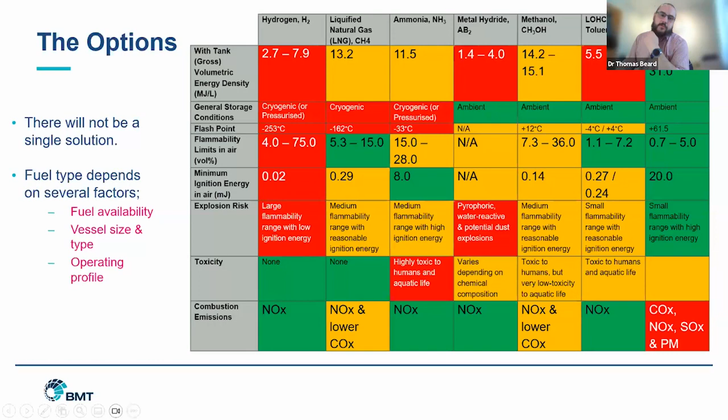I know we've done a lot to get rid of SOx anyway, but the CO2 is still low for anything that's going to be carrying carbon. Other than that, we're just looking at NOx, which we do have to be careful of if we burn it, because it's still a greenhouse gas, or certain variants of greenhouse gases. Others have impacts on health as well.

So jumping into the gas side of things, for hydrogen gas, it's really nice. It's got minimum emissions. It's similar to automotive. Generally stored at high pressure.

One of the worst ones is, as you can see if I just go back one, if we store hydrogen gas down low, if it was to leak, it's lovely, naturally buoyant, and it goes up. But up in a deckhead space on a vessel is where your light fittings generally are. So when they come on, it goes bang.

So we need to account for this when we design things, which I will move on to a little bit later on. We do need infrastructure development still, and I know Professor Chen's going to talk about that later on, so I'm not going to go over that too much.

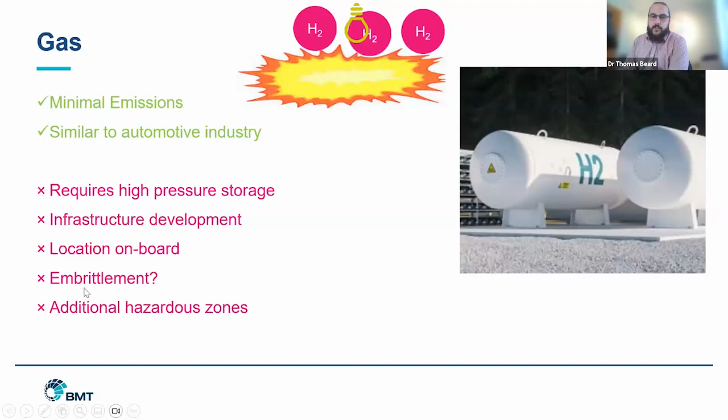There is potential for embrittlement with hydrogen, as always. The location on board, where do you store it? That's a very fun thing that we'll move on to later on as well.

Liquid hydrogen, again, is minimal emissions. Actually, what's nice is that you can store it in a very similar manner to liquid natural gas. The variation is that for liquid hydrogen, we're going down to almost absolute zero at minus 253 degrees centigrade, whereas LNG sits at about minus 162. So there is a massive step change in that, which does have that added problem with the additional energy to get down to that low temperature, which is the cryogenic storage.

And because you're cryogenic, you've got even more possibility of embrittlement because of this aspect. Again, you have potential issues about where you store it. If you think about the Suiso Frontier, which is the current liquid hydrogen carrier that runs between Australia and Japan, they've got above deck storage, and we manage it like that. Again, the infrastructure is an issue, and with all of this, a recurring theme is the additional hazardous zones.

Liquid organic hydrogen carriers can be stored similar to diesel, which is really nice because that means we have minimal changes to storage on board. They are also cyclic in nature.

The way it works is you have your power supply and an LOHC feedstock, which for a simple case is toluene. You hydrogenate your toluene with green or nuclear hydrogen, a renewable source of hydrogen, and then you get your actual LOHC, which if you use toluene tends to be methyl cyclohexane.

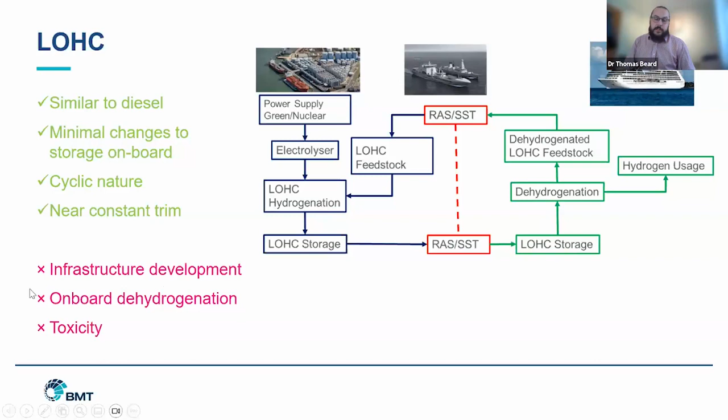And now finally for hydrogen is metal hydride. It's quite a nice one to store on board because you store it in a canister. It's great - you have hydrogen basically around your cylinder.

You absorb the hydrogen by cooling it. When you want the hydrogen off, you add heat and you desorb the hydrogen again, which is really good. There are use cases of metal hydrides already on board vessels - various navies across the world use metal hydrides at times.

What is also good is potentially we can modularize this, so it makes it easier - we don't have to do our absorption on board the vessel. We can take the metal hydride off and have it as a plug and play container system potentially. And because you have to add heat to an extent, unless there's fire, it self-mitigates its release.

But similar to LOHC, you need onboard dehydrogenation - we need to add heat in to get the hydrogen off. Again, depending on how we run metal hydrides, we may need shoreside infrastructure development if we use plug and play. Otherwise, we may have vessels alongside for quite some time whilst we absorb the hydrogen back on.

As I mentioned before about the safety risks, there is a risk because it is generally a powder, of dust explosions if this happens, and the pyrophoric nature.

But one of the biggest problems with metal hydride is the uniformity. There are various metal hydrides we can buy that are almost off the shelf, already developed. There's also significant research going into metal hydrides trying to beef up and get a far greater energy density. The problem is what works in a lab doesn't correlate to full scale - some have worked very well in a laboratory at a university, and when mass produced, it's gone from being a superstar to being absolutely rubbish. So we need to balance that and ensure we know how to build and create the metal hydride such that we can transfer from lab scale up to full capacity.

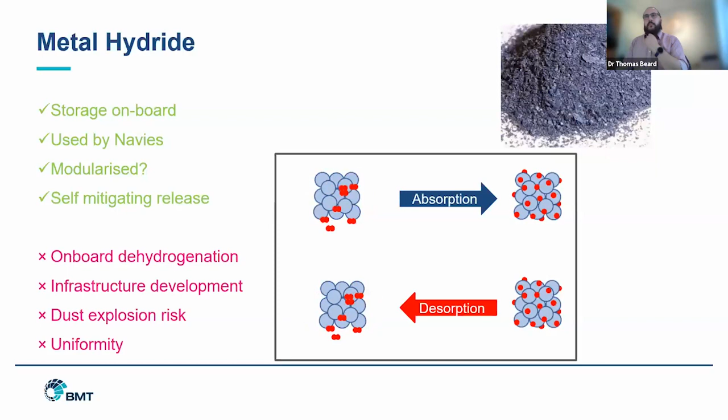Now it's the generic safety. The way it basically happens is we have damage on board our vessel, we would have a loss of containment. Generally you have a release of gas or liquid, or the metal hydrides are slightly different because that will just ignite in air generally.

Then we either have immediate ignition where we get flames and fires, potentially a fireball, especially if it was compressed hydrogen, or if there is delayed ignition, we get a gas cloud or vapor forming, followed by delayed ignition which is a deflagration or potentially an explosion depending on where it's stored.

Or in the case of something like ammonia, you get a toxic cloud form, which again we need to manage. So we need to ensure we're happy with that and how we can mitigate all of these potential risks on the basis that there is a loss of containment.

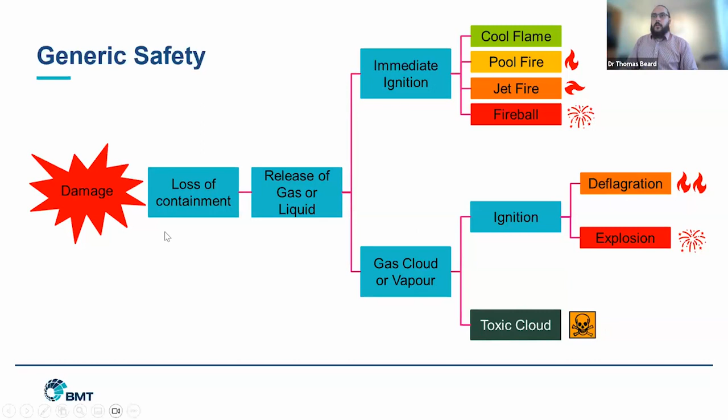I'm going to briefly discuss this. One of the things we see a lot is how we bunker safely. How do you do this? I believe Professor Chen's going to go over some of this later on. My personal view is this is a system about how they recharge hydrogen cars, to a hydrogen dispenser. This is a hydrogen car where it's plugged in. This is for compressed gas, but the way it works is you have a data coupling such that if this breaks, the refueling completely stops. I think that's a really good way of how we could potentially mitigate that.

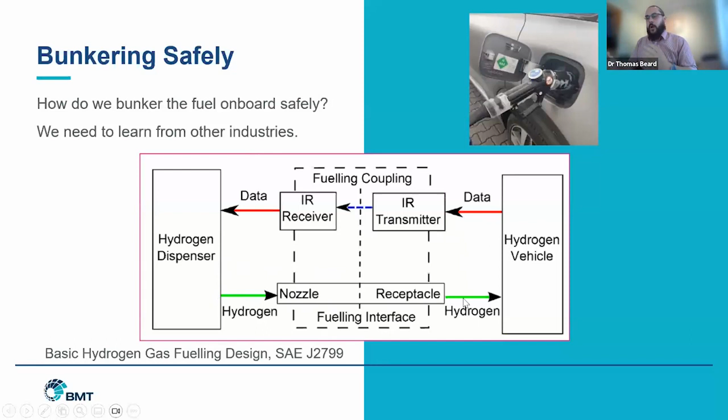Right, some of the requirements of vessels though, so that's all about safety and about some of the fuel. One's fuel availability. In Australia, I know there's a very big push for hydrogen, which is brilliant, and we're going to do that. In other nations, it's not quite the same. The fuel availability is a bigger problem when we look at deep sea shipping. Generally, these require higher energy densities. A lot of people are going towards ammonia or methanol, at least right now, because it's more available. And the issue with that is then we need to have it bunkered at all the ports we go to, which is why there's a very big push at the moment for green corridors.

If we take Singapore, they will have agreed the fuels will be at both ports for the vessels going along that trip. Short sea shipping, we've got the potential to use lower energy densities. That's where hydrogen really can come into its own, and electricity as well. So we could just go straight to batteries. But the other thing we need to factor in is the vessel usage, so cargo carriers versus passenger vessels, which I'll just delve into a little bit now.

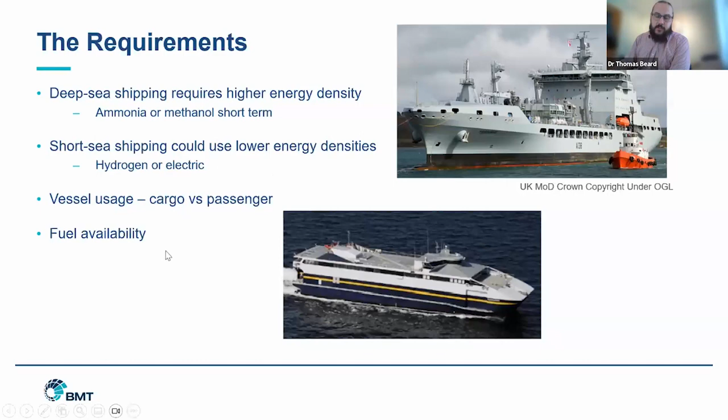Cargo vessels generally have a low population density, and the crew is normally very highly skilled, which allows us to segregate areas. This is a picture of a Tide class tanker for the Royal Fleet Auxiliary, a naval vessel that refuels warships at sea. This is slightly different, but it's a BMT design, which is why I've used this. This one has a crew of about 110. Most carriers like this, generally in a commercial setting, you're talking maybe about 20 people, which is far better. But it can carry over 20,000 cubic meters of liquid. So what that means is that we can segregate, distance, and keep people safe regardless of where the fuel is on board.

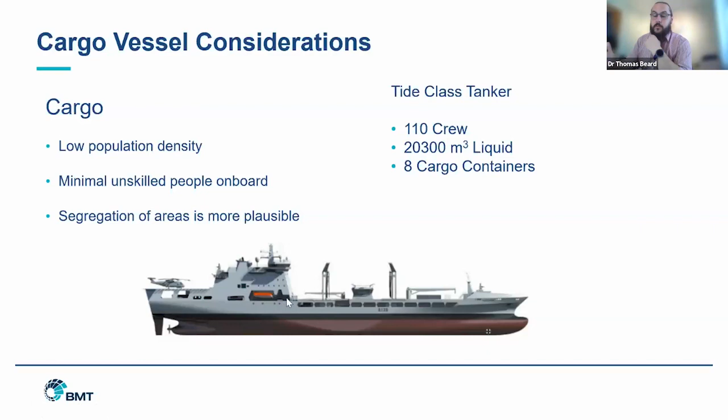The reason I pull this one up is because cargo compared to passenger vessels—this is a Pentland Islands ferry. Ferries are far more difficult. They have high population densities, with lots of unskilled people on board, passengers who don't know what to do in the event of an accident. It also makes it potentially very difficult to segregate areas because you have people all over the vessel. This one carries 430 passengers, with only a crew of 12, and carries 110 vehicles as well. So on something like this, where do you store the hydrogen when you have a vehicle deck full of cars? You have people all over the vessel, so you need to factor that in.

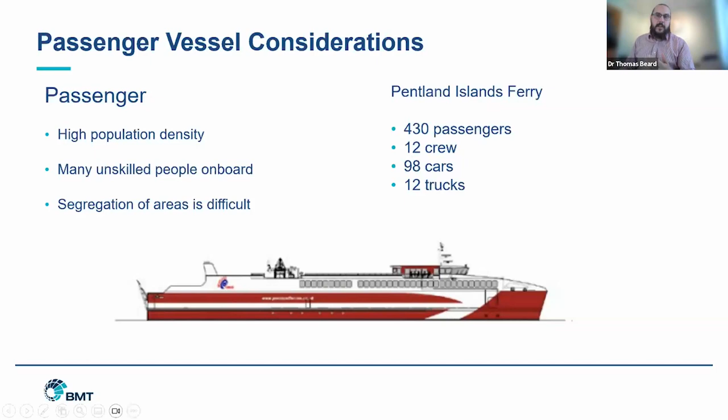From here, I'm going to delve now quickly into design considerations. These are BMT's vessel designs. This is one of our CTVs, crew transfer vessels, workboats. That's a catamaran, and this is one of our super yacht designs.

Basically, it depends where we store it. On the super yacht, we've got storage below deck, which means this is all gas tight. By gas tight, this is where it makes it very difficult for retrofit. Gas tight is very easy for a new build because you can ensure and test it. It's very difficult to ensure that a compartment is gas tight if you are retrofitting, and you've got to do far more work, which can be a problem. You also need airlocks and/or water curtains surrounding anything that carries the fuel. So if I take the GA here of the CTV, if we've got fuel here and the prime mover here, we need to ensure both compartments not only are gas tight, but also the entrance into them has an airlock and potentially a water curtain as well.

And you need alarms so people know if they're entering that area, well, they can't enter the area if there's been a leak. So for instance, if we enter into here from an opening, we need an airlock somewhere here which segregates out. You wouldn't necessarily need an airlock between the two compartments, but you need a route there. On a smaller vessel, it gets quite difficult.

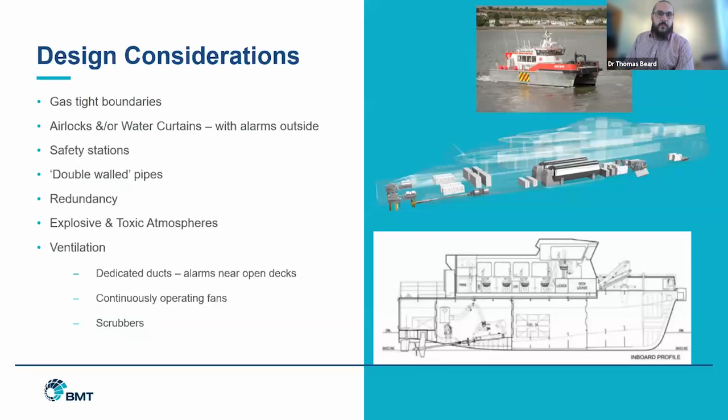So finally, just to move on to some of the environmental considerations. I don't like the term, but hydrogen is an indirect greenhouse gas. Now, what I don't like about this is that when we talk about hydrogen, it's always referred to as its fugitive emissions, which makes it sound bad. When you talk about methane, which is also a greenhouse gas, it's called methane slip. So to me, we as an entity, as a race, and as engineers and scientists, we should use the same terminology.

It's either fugitive emissions for everything, or it's just hydrogen slip. We shouldn't, just because of the way it's being purveyed, call it fugitive, making it sound worse than slip. Slip sounds like an accident - okay, it's a bit of methane slip, ammonia slip, oh well, a little bit of an accident. Fugitive emissions sounds far worse. That's something I personally don't like, and I think we need to move away from. It should all be fugitive, or it should all be slip.

We do have a problem when we burn hydrogen with NOx. We can manage that to an extent, but then you're not getting complete combustion, so we need to manage that - you're not getting that efficiency saving off the engine. If we talk about fuel cells, however, they just produce water, which is ideal. However, we do need to be careful, because we are basically producing pure water. So if we pump that overboard, it's considered a pollutant, because we are changing the local sea state, the salinity, and everything else.

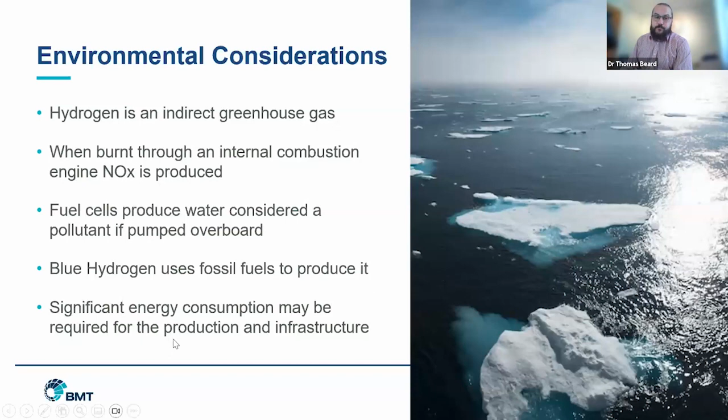So just to conclude, really, each fuel or storage medium has positives and negatives, but we do need hydrogen no matter what. As I've said before, Professor Chen's going to talk about the significant infrastructure required for this. If we move to retrofit on board existing vessels, my personal view is that we should look to external storage - it's far easier to mitigate. And when we go to new build, then we could go below deck. Again, there are different things that we need to account for.

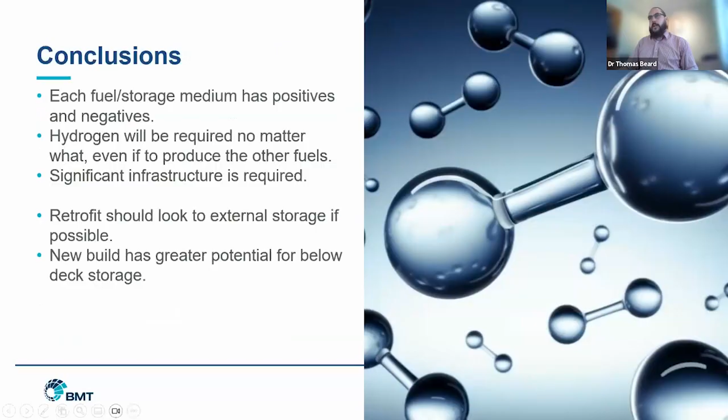Cheers. Thank you very much, Tom, for that comprehensive introduction. I learned a lot listening to you about how to think about some of these challenges, and you've already sparked a lively debate in the Q&A. May I now invite Associate Professor Peggy Chen to take over for our second presentation on ports, opportunities, and challenges in the global hydrogen supply chain.

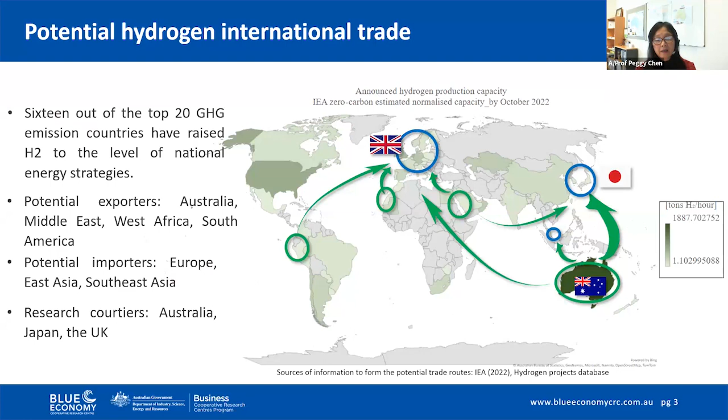So when we read through all the different strategies, we discovered some potential exporters and importers for international hydrogen trade. For example, Australia and the Middle East could be exporters, and in East Asia, like Japan, or Southeast Asia and Europe, could be importers. So this study picks countries and ports from Australia, Japan, and the UK as research subjects, because these three countries are at the front line of hydrogen industry development.

So if you look at all these different elements of the supply chain, the challenges actually occur along the chain.

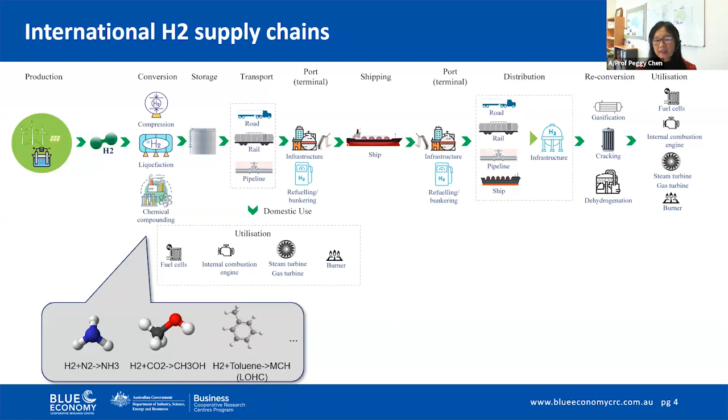And that's why we try to investigate all the challenges and opportunities for ports and find out some solutions. So the research framework for this project actually uses literature review and interview surveys. And from the literature review, we already published a paper in the International Journal of Hydrogen Energy this year.

So we reviewed the port readiness to facilitate international hydrogen trade. Following the review, we did 27 interviews with industry professionals - 13 in Australia, 9 in Japan, and 5 in the UK, including ports, producers, exporters, importers, shipping companies, and governments. After that, we identified a lot of issues. Then we moved to the survey, covering ports, exporters, and importers, because they export, import, produce, and operate ports - they may understand the readiness of all the infrastructure required, and also some of the issues there.

So that's the research framework. Following that, I'm trying to bring my 90-page report into maybe 15 slides to share some findings with you.

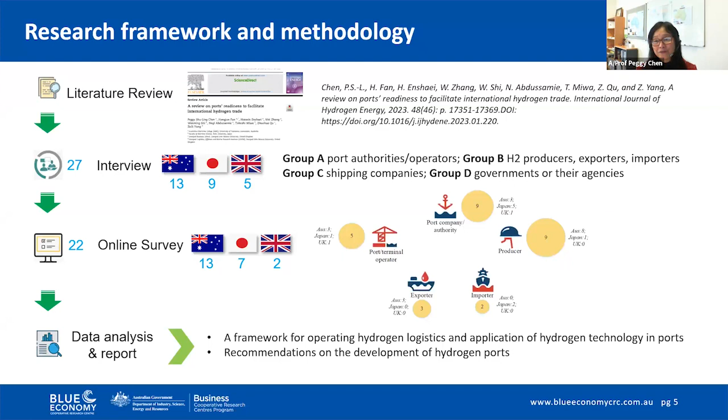Okay, so I will talk about some brief findings from this. The first one is opportunities for ports. There are a lot of challenges, but we can say there are very, very good opportunities for ports involved in the hydrogen supply chain.

For Australia, many participants mentioned it becoming a major exporter of renewable fuels. In the meantime, like Thomas mentioned, we need a lot of energy to produce hydrogen and derivatives, so we also need to import a lot of renewable energy infrastructure equipment or elements. Port decarbonization also becomes a quite good opportunity as well.

In Japan, because they are an importing country, the opportunity is also to enhance their port function in handling hydrogen and increase the volume. But they also want to become carbon neutral ports, very clearly, and they want to decarbonize the heavy industry near the ports.

For the UK, it's a little bit interesting because they consider future energy demand for ports. So they're involved in this area trying to increase the port's resilience to future energy. They also try to provide a greater mix of energy for port customers or for ports themselves. So these are all the opportunities for ports.

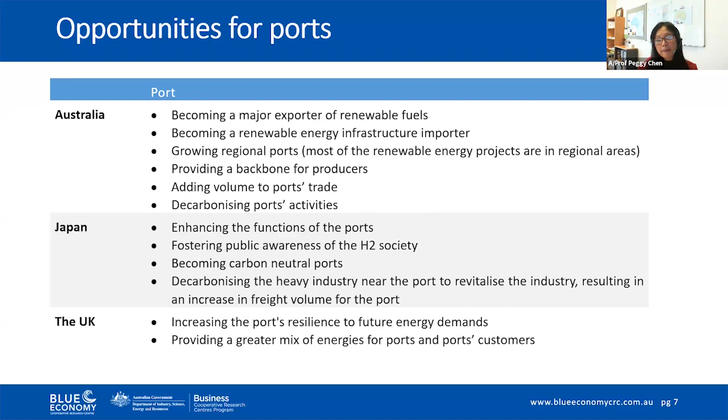Tasmania is also very complex because we have multiple hydrogen derivatives here - methanol, where probably the first project is already confirmed to go ahead, and then ammonia. That could be used for export, but now there's more talk about domestic use as well.

In Japan, you will see in the Kansai area they look at liquefied hydrogen, because they have a pilot project with Australia in Victoria - that's why their focus is liquefied hydrogen. They mainly import it for power generation, for firing power plants, and they import from different sources. They already have quite a few pilot projects.

For the UK, it's mainly from Scotland, and they want to utilize their offshore wind to produce hydrogen, and export it to Europe, the EU mainland, focusing also on ammonia and methanol. I think the UK now has more projects ongoing.

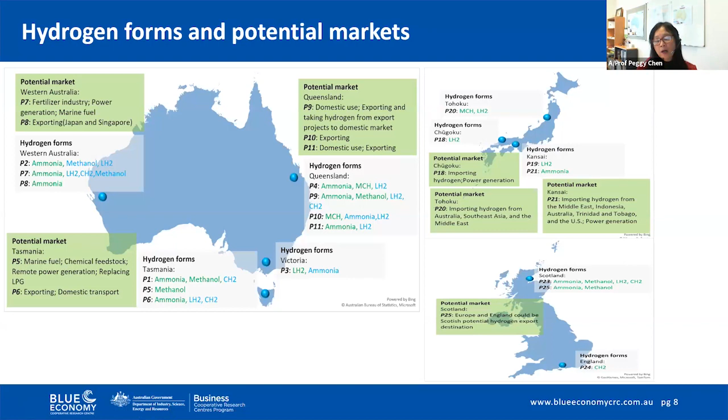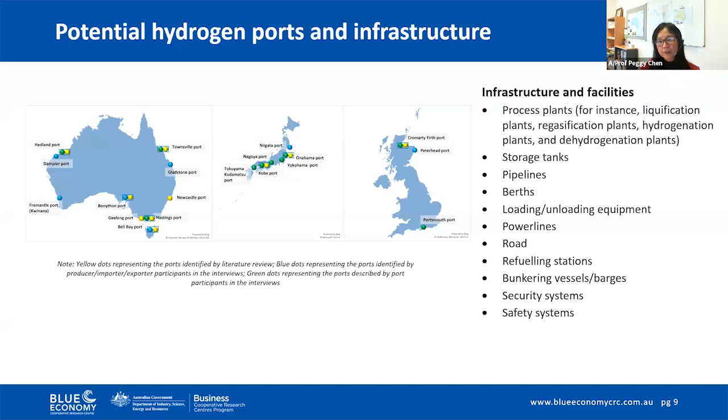In the survey, we asked participants to rate readiness for this infrastructure. I want to mention Tom's point about the risk on board when using a different fuel. For hydrogen, it's actually a new commodity for ports, and it's essential to establish a new risk management system from scratch. But for ammonia or methanol, the industry already operates with these, and even ports already operate with them, so some participants don't really think the associated risk is a really big problem.

But the issue is that before, ammonia and methanol were used for the fertilizer industry or as a chemical feedstock.

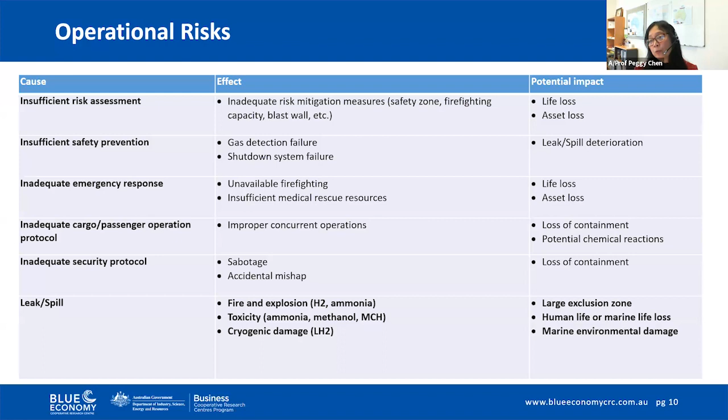For training and education, it's interesting because there are some available training programs in the market in the three countries, but the programs mainly focus on basic knowledge, not much real world operation training. So the interviewees also suggested ports to have safety, health, materials, equipment, cargo operation, or cause and effect of incidents, emergency response training and education programs.

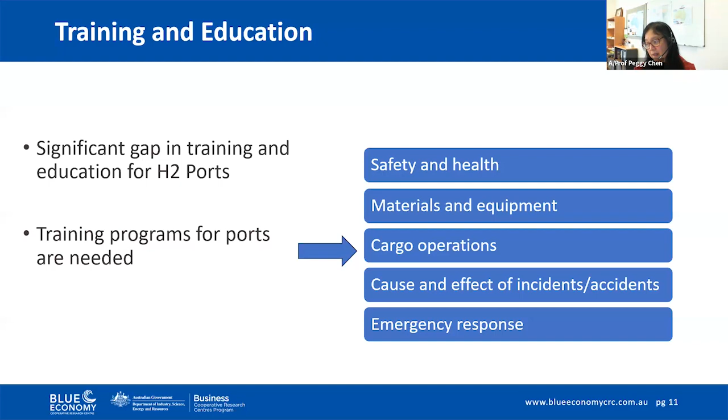That's really required. Talking about standards is also interesting because we all know standards are very important for managing hydrogen. For ammonia and methanol, actually there are standards for safety and environmental aspects. But even for hydrogen, international standards also exist, such as ISO or IEC standards. However, those standards are actually used just for industrial use, not for hydrogen or its derivatives as an energy source.

And that's why there's a significant gap in standards and codes for ports. So to ensure the efficient handling of H2, standardization is necessary, such as for port storage, pipeline, import, transportation, loading and unloading processes. Some participants also suggested certification standards for the cleanness of hydrogen and derivatives are also very important.

We also asked the participants about their view on whether national or international standards are required for ports. The majority said international standards are preferred. It could be because ports, like shipping, are an international industry, and they argue the same cargo moving from the exporting to the importing port should apply the same standards. So that's related to our standards.

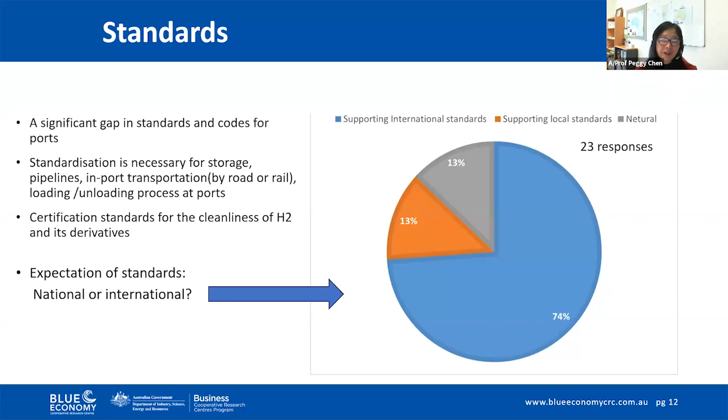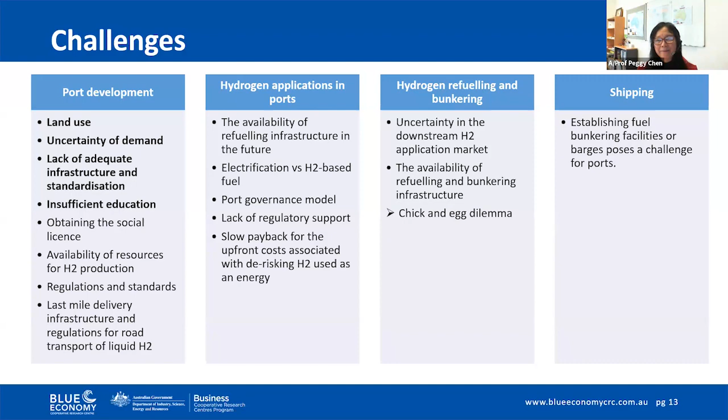So the final bit for the interview findings is government support. It's interesting to see that among these three countries, Japan has received very good support from government, like a national carbon neutral port initiative, with a subsidy of 50% of the cost of extending the quay for hydrogen importation. The UK also has some, mainly for the ports. Australia, yes, we have, but it's mainly from hydrogen project money. The participants really suggested a lot, especially for financial support, and I think carbon tax and direct finance support were mostly mentioned.

From the regulation and policy side, they really suggested setting port emission targets, which would encourage ports to use hydrogen or derivatives for decarbonization. So this is for the government support.

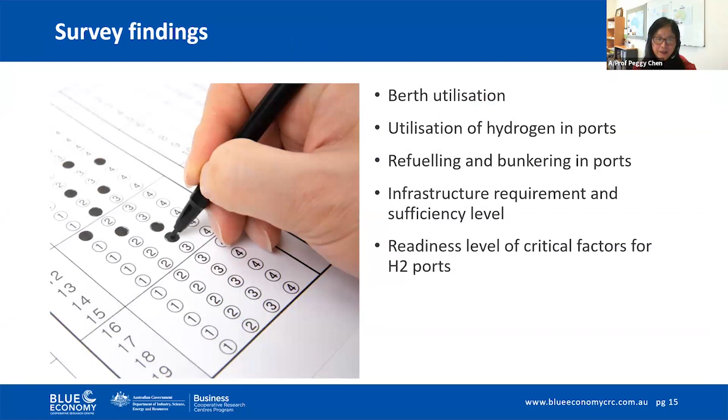Mindful of time, I'll jump into the survey findings, and there's more interesting information you may want to know. So the first survey finding is about berth utilization.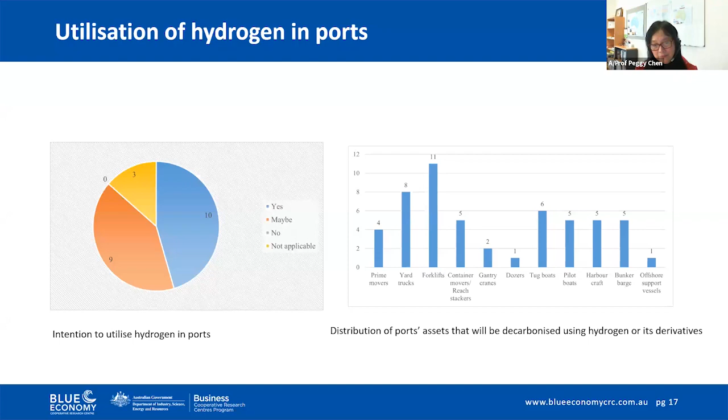The assets they want to decarbonize using hydrogen or its derivatives include forklifts, yard trucks, and tugboats. I think tugboats using hydrogen to decarbonize could be a really good choice.

For bunkering and refueling, 13 respondents said yes, they intend to provide refueling and bunkering service at ports, and 6 said maybe. For fuel type, the first preference is ammonia, then methanol, and liquefied hydrogen is next. I think that's probably because the downstream technology hasn't really matured for vessels to use liquefied hydrogen.

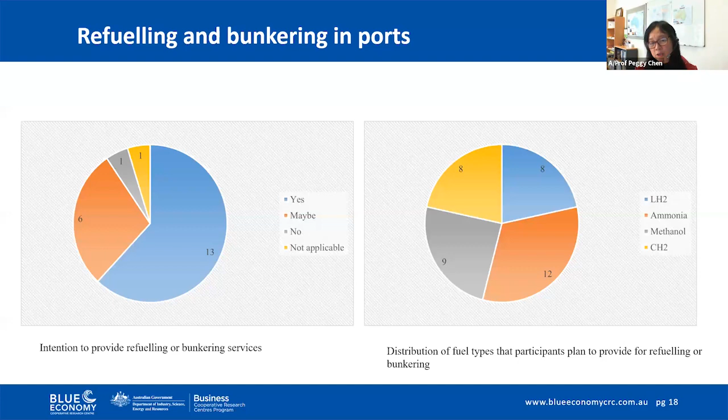But like Thomas said, maybe short sea shipping could use hydrogen, and that may also create port willingness to do bunkering for those small vessels.

For infrastructure requirements, remember we identified those from the interviews, and in the survey we asked them to confirm what the infrastructure requirements are for their ports. Of course different ports manage different types of hydrogen, so hydrogen forms may count differently, mostly in terms of the importance of each infrastructure.

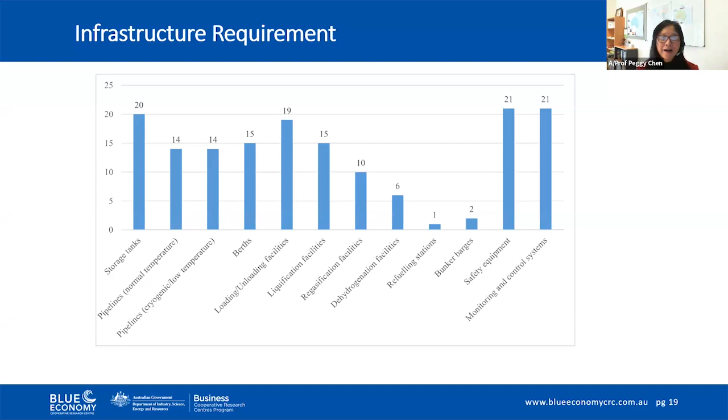Having said that, we asked them to rate the sufficiency level of that infrastructure, and you'll see three tables here. A rating of 5 is acceptable, but the majority of port infrastructure and facilities are below 5 across the 3 countries. You may notice UK only had 2 responses from 2 ports, which is unfortunate. But if you look at Australia and Japan, it seems just under the acceptable level, except berths in Japan and the UK. So overall, port infrastructure and facilities mostly fall below the acceptance range.

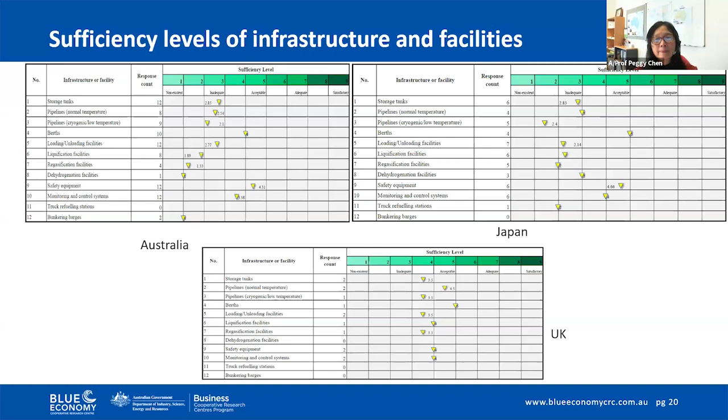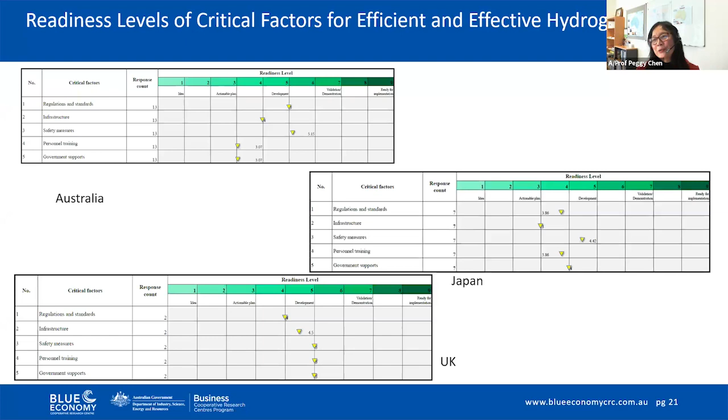We also identified 5 critical factors from the interviews: regulation and standards, infrastructure, safety measures, personnel training, and government support. We asked participants to rate the readiness level of these critical factors for operating hydrogen imports, and the result is similar. I think it's all below 5, probably except Australia's safety measure, which is about 5. This means readiness for these critical factors in all 3 countries is still in the development stage—still a way to go for all three countries.

Based on the findings from the interviews and survey, we developed a framework for operating hydrogen ports. If you look at this diagram, there are 3 main components in this framework. The first is key elements for hydrogen logistics imports, focused mainly on exporting and importing ports on the left and right-hand sides. On the export side, the initial task for ports is to transition themselves to import the necessary infrastructure or elements for producing hydrogen and its derivatives.

That's why new berths may be required, such as for offshore wind farms, solar, etc. Or we may even need to import electrolyzers if we don't produce them nationally or domestically, so more berths are needed to accommodate that.

From the production side, if production happens near or in the port, then conversion into ammonia, methanol, or compressed hydrogen requires conversion facilities, and storage tanks are key to the port. It also has to be, for example, pressurized, and low temperature pipelines are essential for hydrogen and derivative transportation as well.

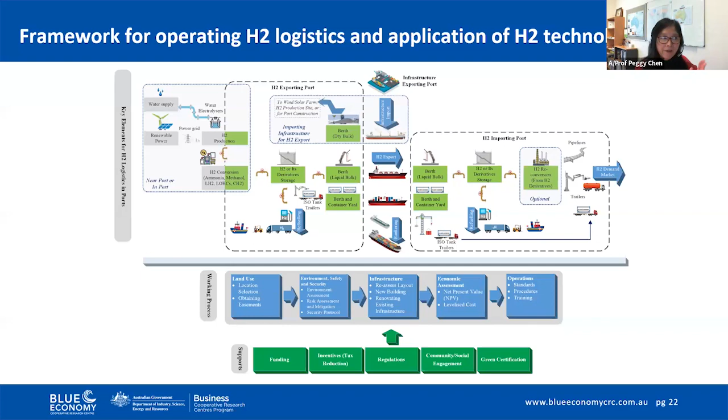The report will be released maybe by the end of the year, it's already finished. So if you're interested, you could request a copy to read the information. That's all from me. Thank you very much.

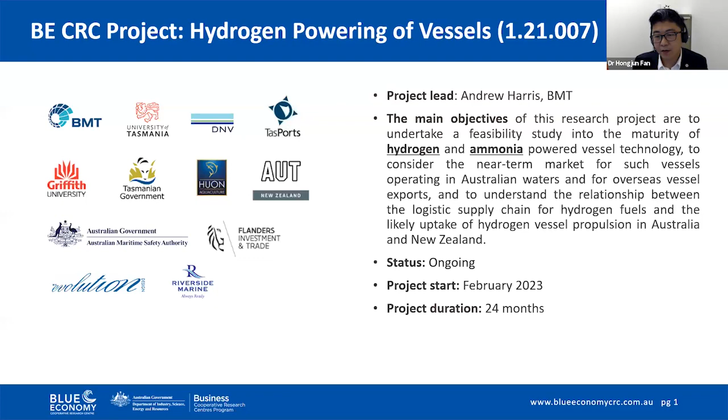The project started in February of this year, and it's a 2-year project. Today I'll share some findings over the past 6 months. I'm going to talk through 4 parts. First, we'll look at the carbon reduction target for Australian vessels and the possible solutions to reach the target. Second, we'll discuss the role hydrogen can play in decarbonizing Australian vessels. Third, I'll introduce a case study we're still working on, looking at the differences between diesel systems and hydrogen systems. Finally, we'll summarize the presentation and outline our next phase of work.

So let's look at the first part. Under the Australian flag, there are 2 types of vessels: international navigation merchant vessels and domestic vessels. International vessels must follow the IMO's decarbonization trajectory. In July of this year, the IMO set a new target for international shipping to reach zero emissions by 2050, or around 2050, depending on different countries' situations.

As for domestic vessels, they must align with Australia's decarbonisation target. The Australian government has set a target to reach net zero by 2050, and for the transport sector it has the potential to reach zero before 2050. So whether international or domestic vessels, 2050 is the deadline.

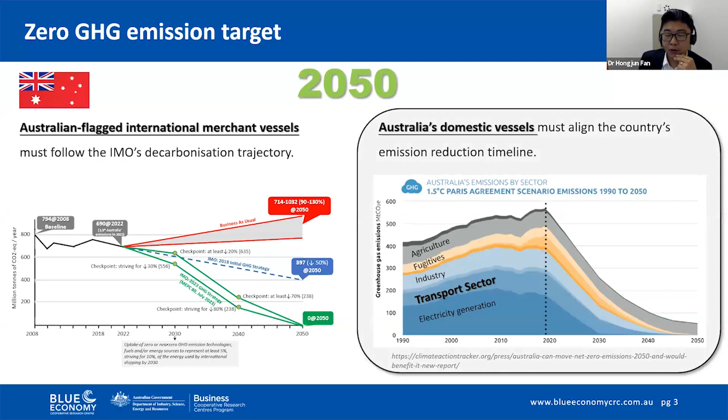Let's look at this. Australia's total emissions in the 2020-21 fiscal year were 465 million tons CO2 equivalent. Of them, the transport sector accounted for 20%, which was 90 million tons. Domestic vessels emitted 2 million tons.

It's only 0.42%, not a lot, but we must take the responsibility. Going from 2 million tons to zero within 27 years from now on is the challenge we are facing. This 2 million tons is our enemy to fight against, so we should have good weapons. The clock is ticking, but the question is where to start.

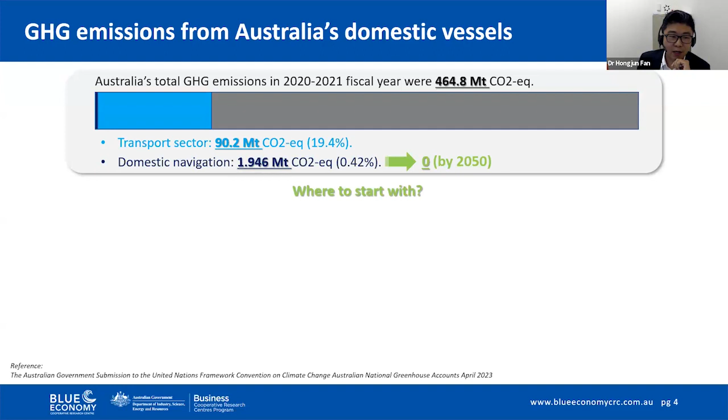Unlike the international shipping fleet, small-sized vessels less than 50 meters long dominate the Australian domestic vessel fleet. According to AMSA, as of July this year, there are 8,700 small vessels operating in Australian waters with valid certificates.

If we zoom in on this number, we can see that 3,600 vessels are over 20 years old. This means these vessels will be replaced with newly built vessels within the next 10 years. So we have the opportunity to put thousands of zero-emission vessels in Australian waters within the next 10 years. But the question here is, how do we do that?

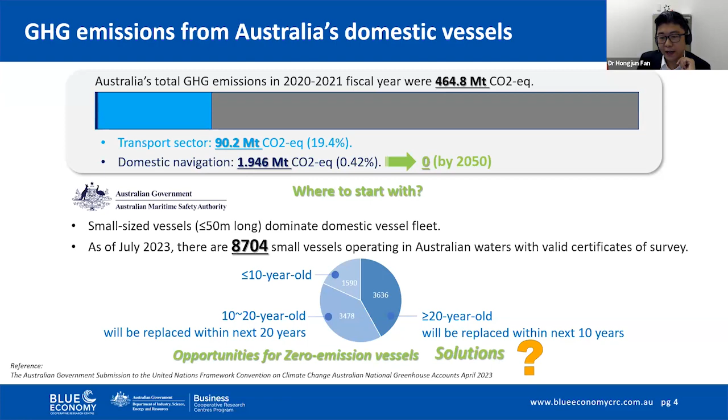This is the family tree of decarbonization solutions for shipping. We are talking about zero emissions, so we have biofuels and green electricity. In the electricity pathway, we can use batteries and e-fuels. E-fuels include hydrogen, e-ammonia, e-methanol, and e-LNG.

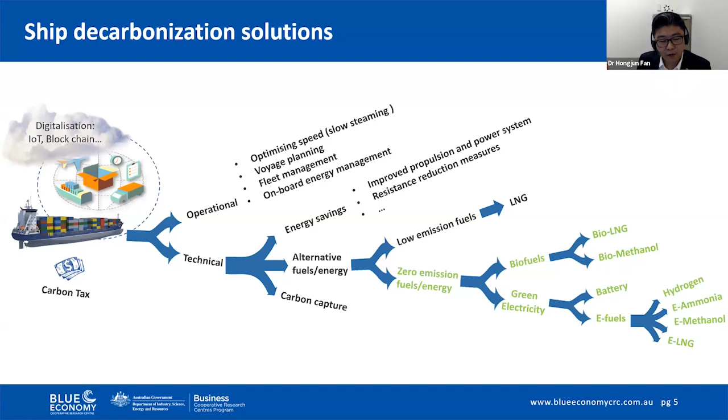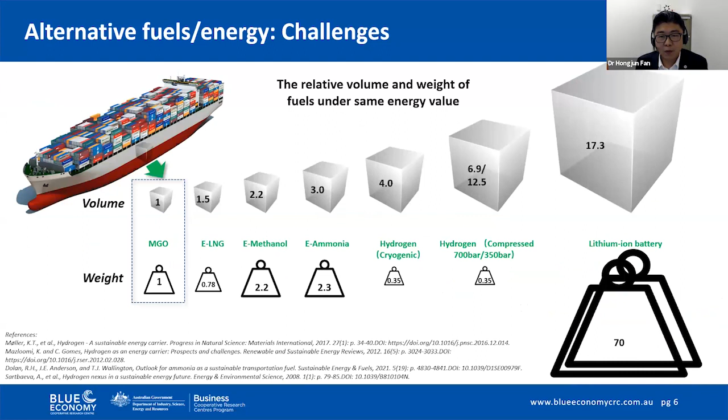So what's the impact of using these fuels for a vessel? Let's look at this. If we use fuel oil, we consider the volume and weight of the fuel to be 1 unit. Let's compare different fuels based on the same energy value. I think Thomas explained this very clearly. Apparently, e-fuels are better than batteries.

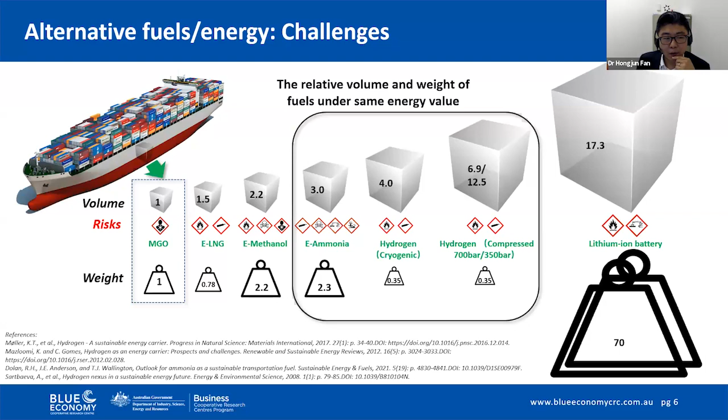When it comes to risks, we are facing new de-risking challenges, of course. In this project, we are exploring the feasibility of using hydrogen and e-ammonia, but this doesn't mean we are against the other options. As a first step, we focus on hydrogen. So how can hydrogen decarbonize Australian domestic vessels? Let's look at the second part.

Hydrogen is a direct energy carrier of renewable electricity, and the well-to-wake emissions of using hydrogen could be reduced to near zero. No air pollutants, no toxicity, and hydrogen storage and PEM fuel cell technologies are mature. However, some challenges must be overcome, as Thomas mentioned: high pressure and cryogenic storage, fire and explosion risks, lack of regulations, unavailable bunkering infrastructure, and the green hydrogen supply chain has yet to be built, as Professor Peggy Chen mentioned in her presentation.

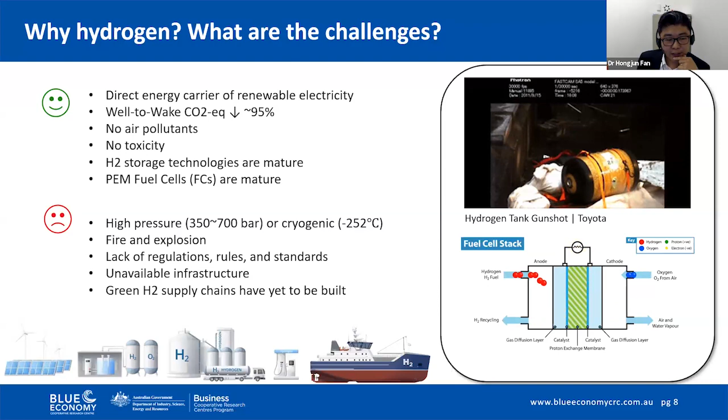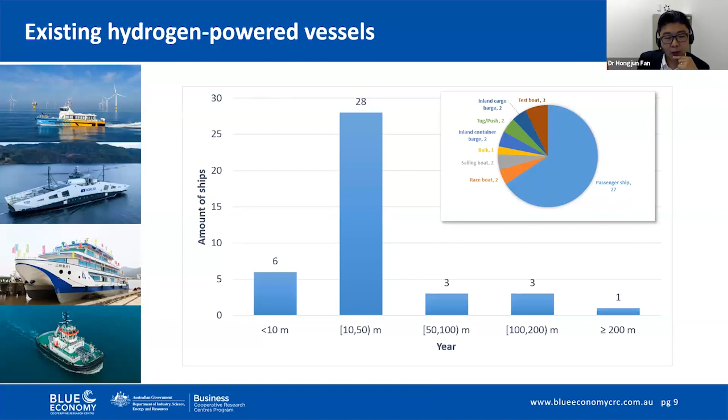Fortunately, as of today, globally there are 41 existing hydrogen-powered vessels. These vessels give us valuable knowledge, and most existing vessels are less than 50 meters long. This caters to Australian domestic vessel scenarios. The existing vessels include passenger vessels, cargo barges, containers, tugboats, and race boats.

Most of these vessels' power outputs are less than 200 kilowatts, quite small. Only one existing hydrogen vessel has power exceeding 1 megawatt, reaching 1.2 megawatts, which is an inland container barge in Europe.

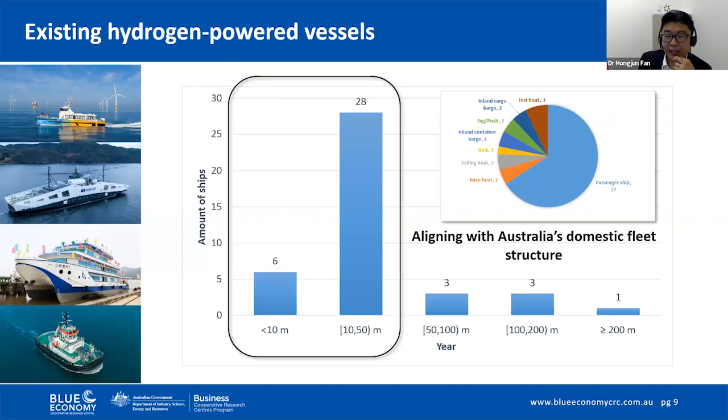As hydrogen technology matures, we are very happy to see that more and more large vessels will use hydrogen fuel cells at the megawatt level before 2030. The largest one will be 23 megawatts. It's quite large. The fuel cell system includes the stack and its balance of plant, or BOP, systems.

The fuel cell stack is like an onboard power generation plant. The BOP system includes the hydrogen supply system, air supply system, and seawater cooling system.

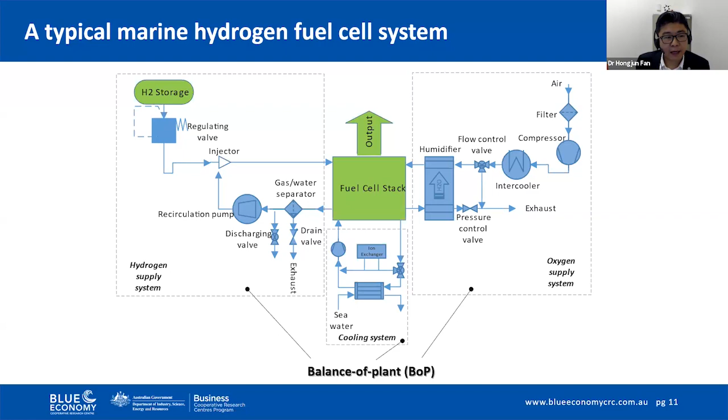We did a preliminary assessment of the readiness levels of onboard hydrogen technologies. The levels are measured on a scale from 0 to 9. As for energy conversion, we can see that PEM fuel cells have reached full commercial application, so we gave it a level 9. Internal combustion engines and solid oxide fuel cells are still under development.

For onboard storage, compressed hydrogen tanks are mature, and cryogenic liquid hydrogen has been used on a Norwegian ferry, so we gave it an 8. The metal hydride method has been demonstrated on a few test boats, and high-pressure hydrogen bunkering and liquid hydrogen bunkering technologies have reached levels 7 to 9. This could be truck-to-ship, portable tank swapping, or onshore station to ship.

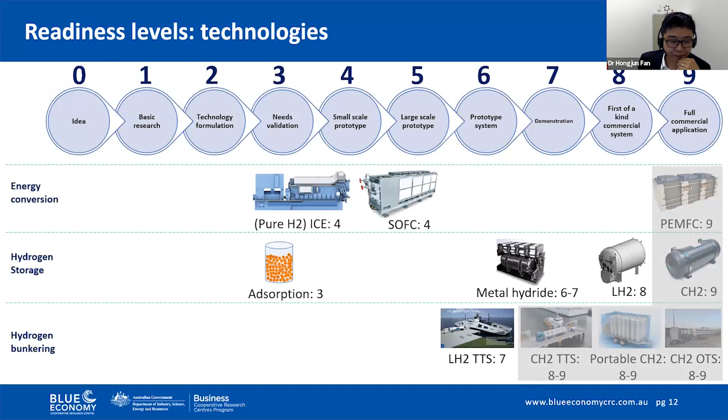Therefore, in our opinion, an initial technical combination for small-sized vessels could involve the use of a PEM fuel cell plus compressed hydrogen. The bunkering availability is a key factor. Australia has started to build hydrogen supply chains. Australia's first commercial hydrogen refueling station opened in Port Kembla just a few weeks ago.

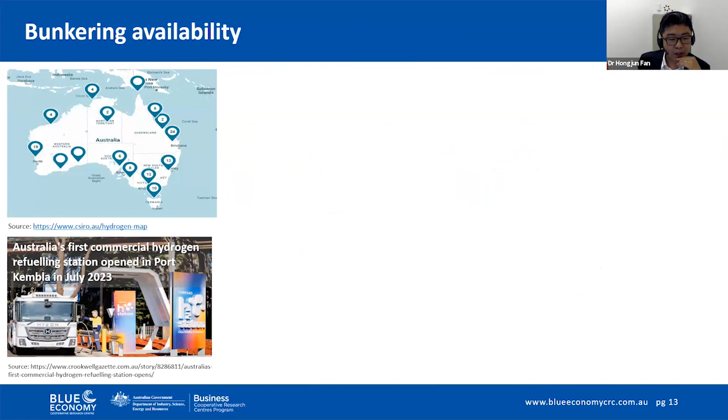It's a good start for future bunkering stations in ports. Professor Peggy has introduced the IAMU project.

That project also conducted a survey to ask participants' willingness to provide hydrogen refueling or bunkering services in ports. 13 participants from Australian ports and hydrogen producers answered this question. 11 said yes. This is a good signal for the availability of hydrogen bunkering in Australian ports, but more solid work needs to be done.

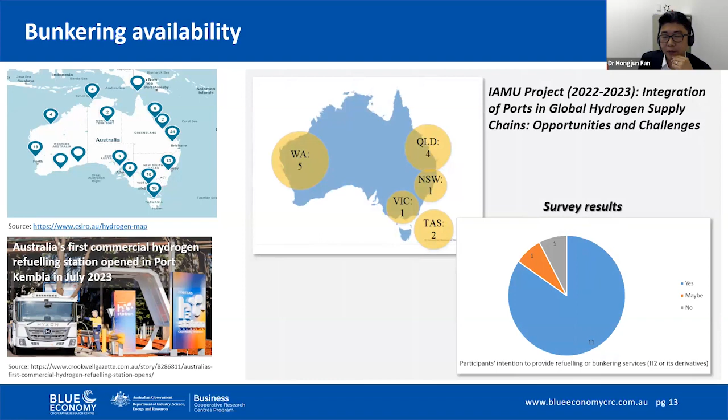Economic performance is essential for using hydrogen on vessels. We have compiled data regarding the CapEx and OpEx of hydrogen vessels. This data will be a foundation for our case studies.

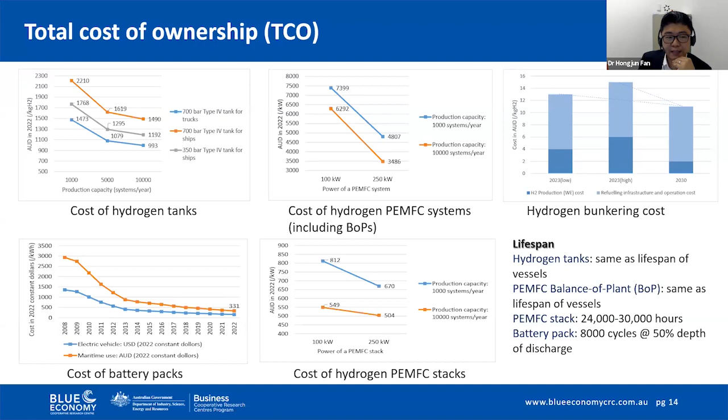Regulatory readiness is very important. In this regard, IMO has issued guidelines for fuel cells. However, there are no IMO regulations on hydrogen storage, bunkering, and safety systems on board. IMO's regulations for hydrogen-powered vessels are under drafting and might be completed by 2025 or 2026.

AMSA has released a novel vessel policy statement in 2022, including hydrogen as a marine fuel. Some classification societies have developed their rules for hydrogen-powered vessels, including ABS, BV, CCS, DNV, KR, and LR. These class rules address some requirements not covered by the IMO regulations. So AMSA may accept the application of these rules to facilitate alternative design approaches for hydrogen vessels.

Standards Australia has planned to establish the Australian Hydrogen National Standard System, which will be very helpful for using hydrogen on vessels. Some professional organizations have also developed guidelines.

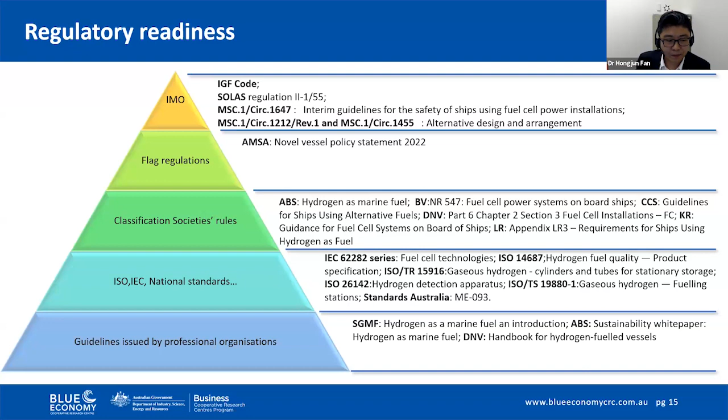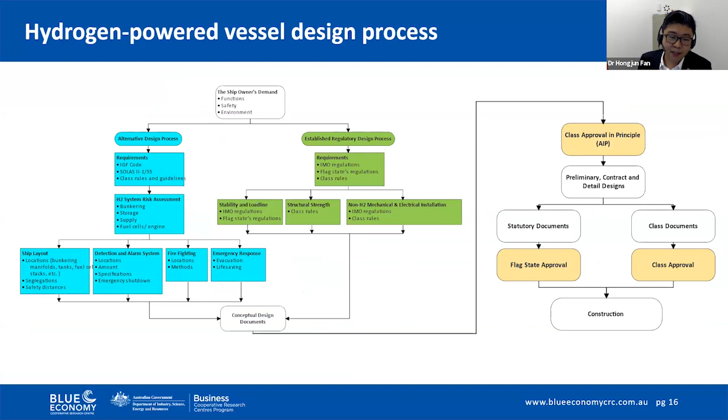Given the lack of IMO regulations, in this project we proposed a process for designing hydrogen-powered vessels. It combines the established regulatory design process and the alternative risk-based design process. Now we have technologies, we have regulations, class rules, and standards, even though not enough, and we have a design process. So it is very possible to design and build hydrogen-powered vessels in Australia.

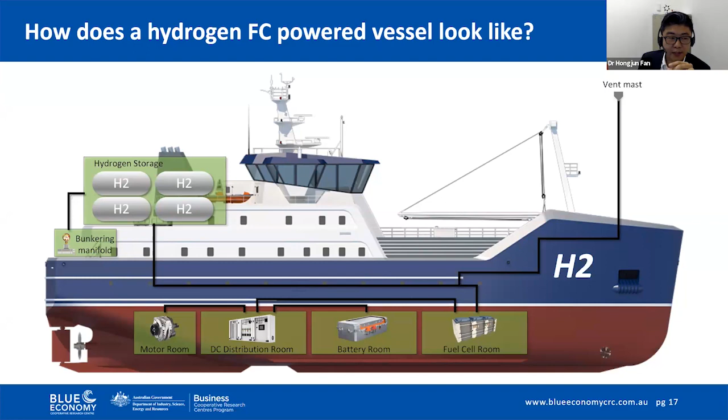How does a hydrogen-powered vessel look like? Usually she has bunkering manifolds, fuel tanks, fuel supply systems, fuel cells, batteries, switchboards, electric motors, and safety systems, for example the gas venting system.

We are quite familiar with traditional diesel vessels. What are the differences between the diesel system and the hydrogen system? Let's go to the next part, a case study.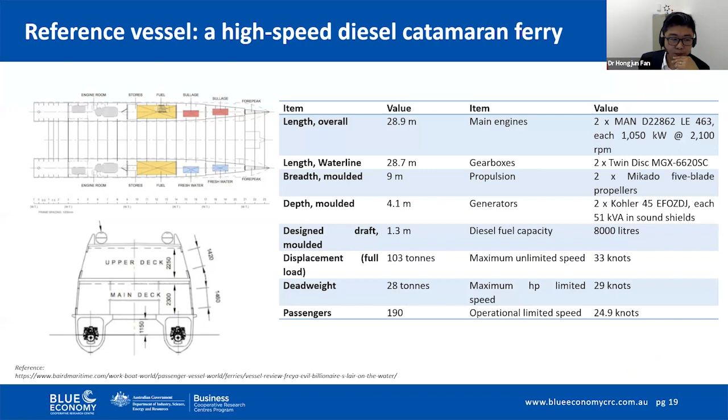We used an existing diesel-fueled high-speed catamaran ferry as a reference vessel. She's 29 meters long, can accommodate 190 passengers. Her operational limited speed is 25 knots. We have known the diesel engine output power, which is...

1,925 kilowatts at 25 knots. So we can infer the propulsion power of the vessel, which is 1,849 kilowatts. Using this propulsion power, we estimated the fuel cell stack output power, which is 2,200 kilowatts. Considering hydrogen's lower volumetric energy density, we assumed the bunkering frequency being once a day.

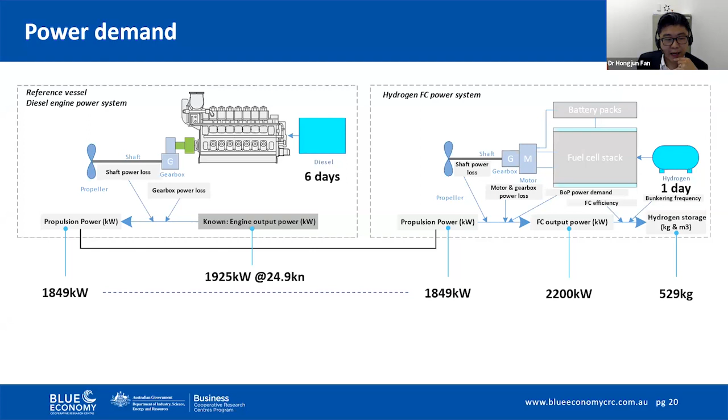So we got the required hydrogen storage on board being 529 kilograms. Based on this power and the fuel demand, we designed a hydrogen power system for this vessel.

The system has two independent branches, as you can see in this figure, left and right. If one branch has problems, the remaining one can continue to work. The fuel cell stacks and battery packs work together to provide power. The battery packs boost the fuel cell systems in responding quickly to variable operating conditions of the vessel.

When the vessel requires low power, the fuel cell system can generate extra electricity to charge the battery. We also designed backup plugins for battery charging. The system requires 88 units of 350 bar Type 4 hydrogen cylinders.

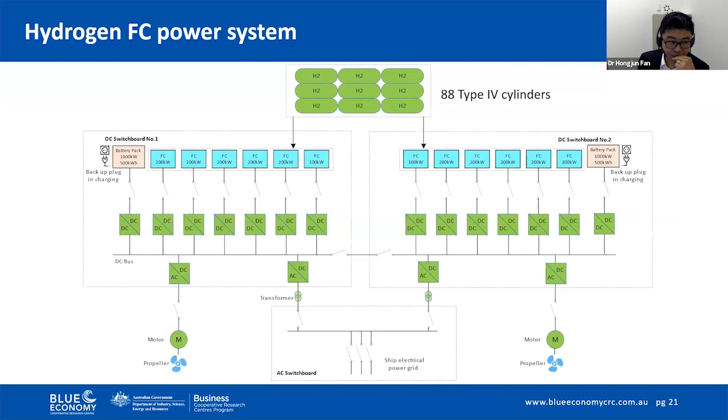A vessel's design is very sensitive to the weight and size of the power system. Based on the equipment maker's manual, we got the sizes and weights of the equipment for the diesel and hydrogen systems. Let's look at the comparisons.

On the left-hand side, the vessel's diesel system occupies 17 cubic meters, while the hydrogen system occupies 68 cubic meters, which is 4 times that of the diesel system. On the right-hand side, the vessel's diesel system is 15 tons, while the hydrogen system is 34 tons, which is 2.4 times the weight of the diesel system.

So we can see that under the same propulsion power, the hydrogen system cannot be accommodated within the existing design of the reference vessel. Redesign of this vessel is necessary to fit the hydrogen system.

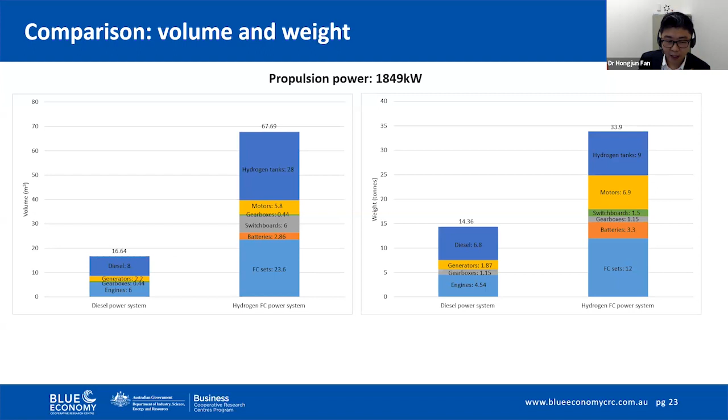If we don't redesign the vessel, it requires a substantial reduction in the vessel's propulsion power. So we calculated the propulsion power by reducing the volume of the hydrogen system to a comparable level with the diesel system. As the hydrogen cylinders can use the space on the vessel's roof, we consider the volume of the equipment, except for the hydrogen cylinders, to be comparable to the diesel system.

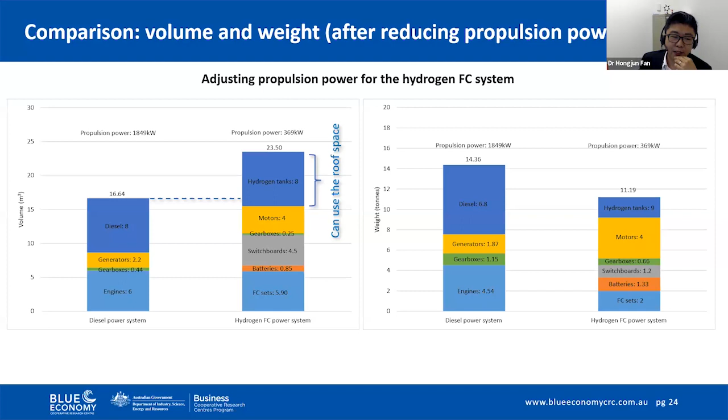So the propulsion power should be reduced to 369 kilowatts, which is 20% of the original propulsion power. Reducing the power means reducing the vessel's speed.

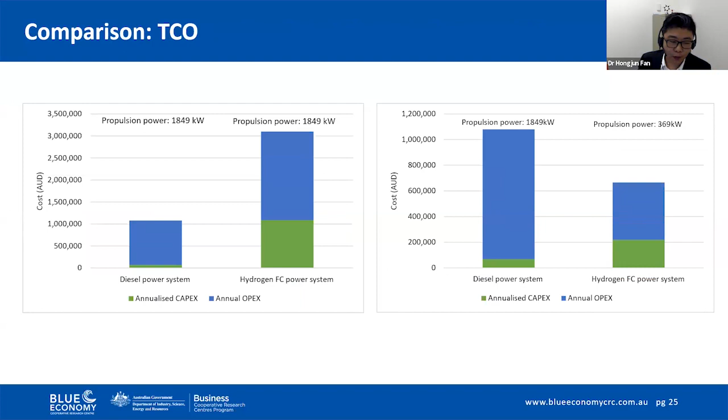We also compared the cost. The left figure compares the cost for the two systems at the same propulsion power.

The cost of a hydrogen system is around 3 times that of the diesel system. So finally, let's summarize the presentation. Using hydrogen as a marine fuel can help Australian vessels reach zero emission target. However, hydrogen's volumetric energy density is very, very low, leading to a small onboard fuel storage capacity, and we need to increase the bunkering frequency.

And existing marine hydrogen fuel cell products are very large and heavy, posing challenges for vessel designs. So we need more compacted products from the industry.

And to achieve the same propulsion power, the cost of the hydrogen power system is around 3 times that of diesel system. Advancing technologies and market measures like carbon taxes are necessary to improve the competitiveness of hydrogen powered vessels.

So next step, we'll conduct feasibility studies for a broader range of representative Australian domestic vessels. And we'll consider not only commercially available technologies, but also emerging technologies still in research and development stage. For example, metal hydride storage technologies and more efficient fuel cell technologies.

So our project is still ongoing. I hope we can have other chances or webinars, maybe a few months later, to report our new findings. Thank you very much for listening.